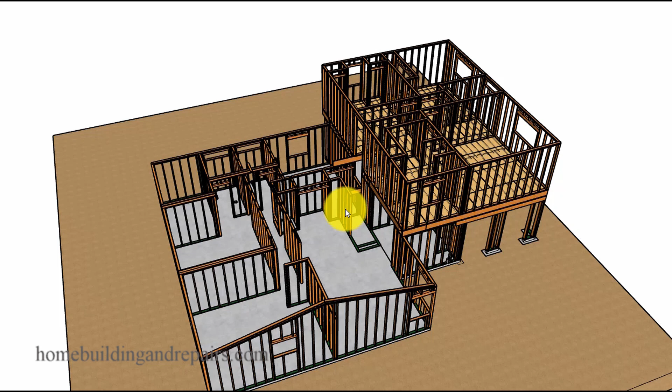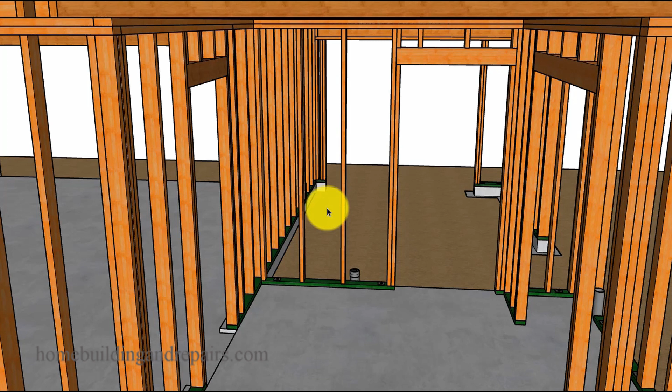In this video, I will not be showing you how to figure out and cut all of the stair stringers and the rest of the components. However, I will be providing you with a stairway that I built one time for a second story home addition, and some of the reasons why I built it that way.

So let's go ahead and get started with the front door here. You will come into the front door and into a little entryway, and then you will come through the stairs into a dining room, living room, or you can go into the garage or up the stairs to the second story addition.

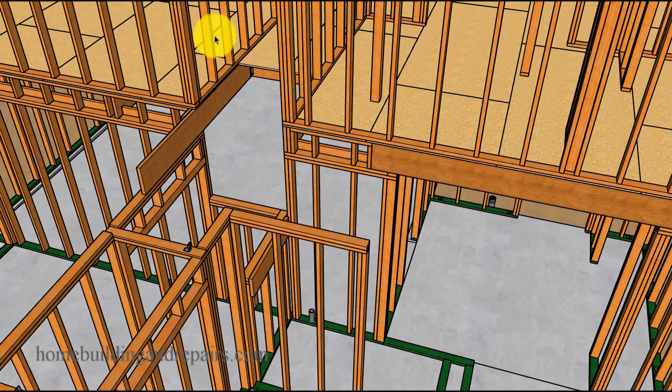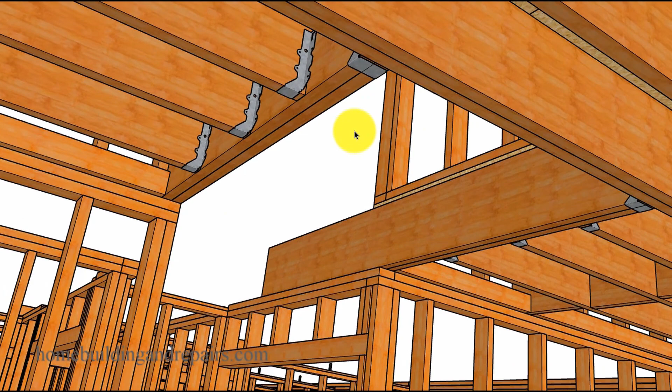We have the floor framing and the double joist on each side that will be supporting the other joists here, along with a double joist that we will use to connect the stair stringers to at the top, and of course our double and single hangers. This will also be the ceiling in the garage, along with the walls that will be supporting the landing.

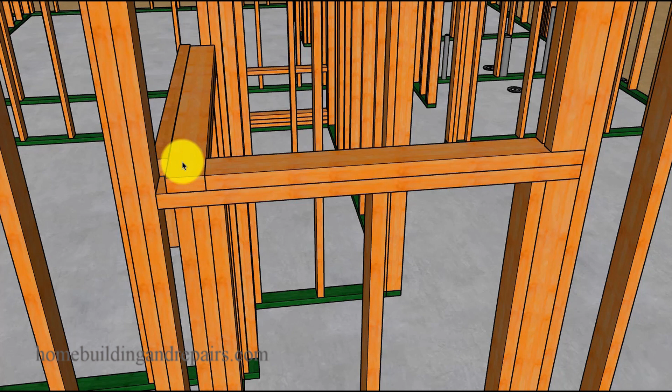Now, if you notice here, I set this back an inch, and that's because we're going to be using the rim joist here as one of our risers. Otherwise, I would have set it back 1 3/4 inches if I was going to use a piece of material for the riser that was going to be 3/4 of an inch thick and then attach it to the front of the rim joist. That will make a little more sense later on, along with bringing this plate out so that I could make a nice connection to the wall framing studs.

This might not seem like a big deal, but I've seen plenty of framers stop this right here and then add some type of a spacer block, and that won't be needed if you do it this way, along with a ledger that we will use to connect the lower stair stringers to the platform.

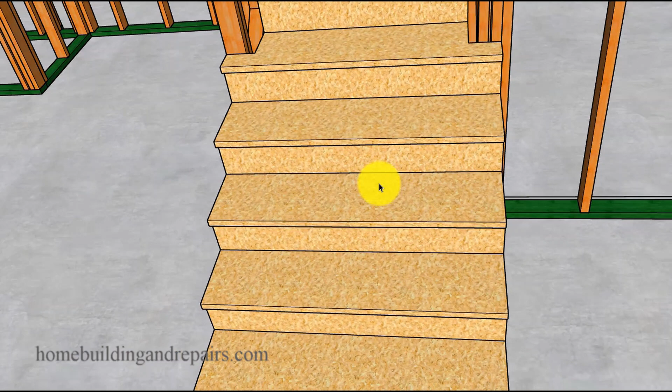Next up, let's go ahead and install the stairway. We're going to be using 2x12 for our stair stringers, along with 3/4 inch OSB for our treads and risers. We will be installing 2x4 studs that are going to be angled at the top underneath the stringers on both sides, so that we can drywall the sides of the stairway and have a nice flat wall here. And of course, we will need to install angled fire blocks.

For those of you wondering why we nailed a 2x4 onto the side of the stringer, that would be to provide us with enough space to install drywall and a skirt board up against the inside of the stair. That would be on both sides of the stairs.

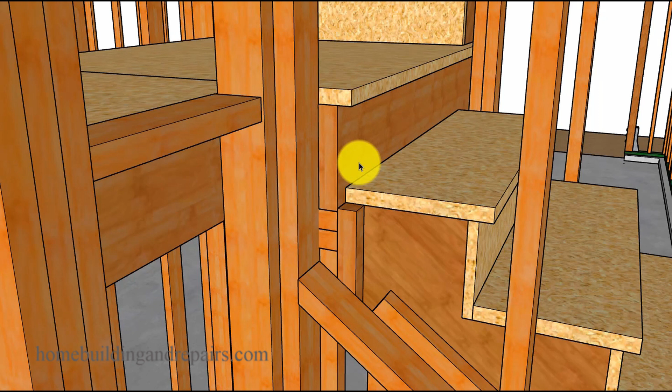And of course, our rim joist here, we did not put a riser on here. Something like this will usually require you to remove an additional 3/4 of an inch off of the top of the stringer. So just don't do this without doing that. And of course our 1-inch overhang or nosing, and our fire blocks around the perimeter of the landing.

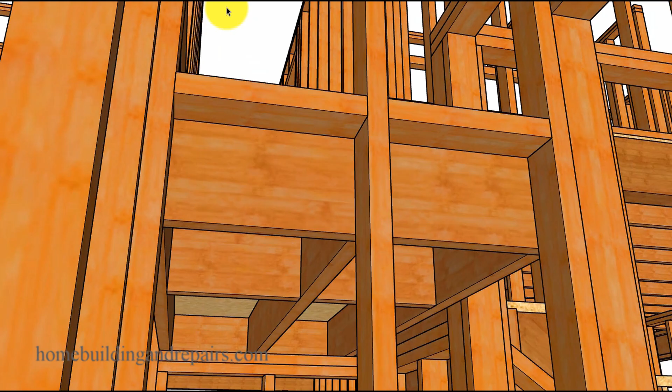And our joists are going to cantilever into the garage. For those of you wondering why I don't have any wall framing here, that's because this opening is going to have sliding closet doors.

I will need to get a little creative here when finishing it. Really all I'm going to do is attach one sheet of drywall here, and then glue it to the piece of drywall I put on the other side.

If you needed more room, you could always move this joist back a little bit so that the drywall on this side could run all the way down, so you could nail the back of the drywall into the joist and the front into the framing on the other side. And of course I have blocks here so we can break the plywood.

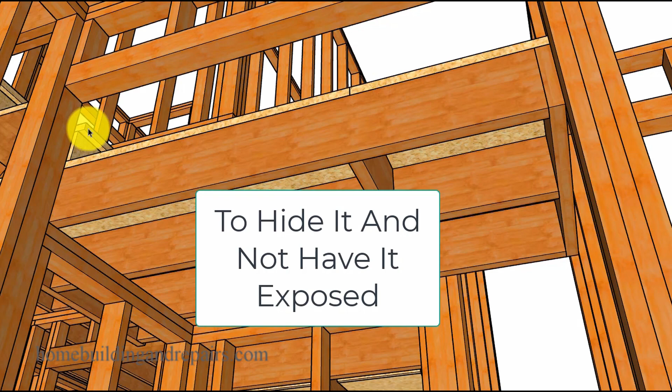I wouldn't be doing this if I wasn't going to be building a wall above here. You'll learn more about that in a future video when I show you how I'm going to tie everything together. So if this was going to be our landing and it was going to run all the way across here, I would try to put the break underneath the stair stringers if I could.

And of course our cantilevered landing here so that our stringers can sit on top of it, and we will need a wall here. So let's go ahead and build one.

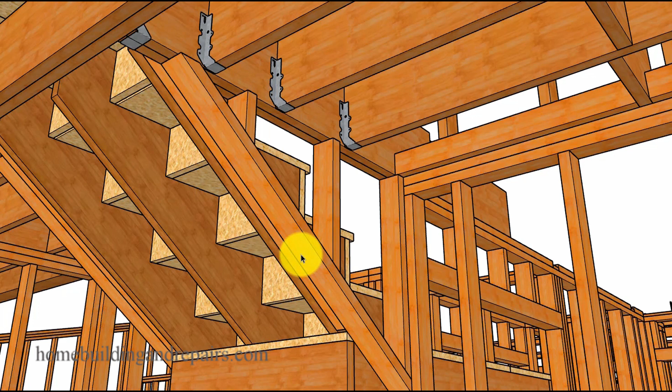We will have an angle at the top and an angle at the bottom, and you will need to check with your local building department. Sometimes you will need a 2-hour firewall underneath the stairway in a garage. That would require 2 layers of 5/8 Type X drywall anywhere the stairway was exposed inside the garage. Hopefully that makes sense.

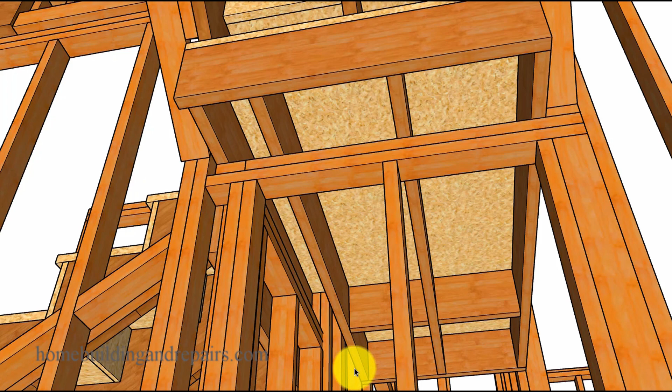All of our framing can be attached with 16D nails, including the cantilever along with the joist. You can use hangers if you want to. Something like this I wouldn't feel would need it. However, I understand there are a lot of people who are hung up on hangers and almost every type of building hardware out there. I came from an era where they were just starting to use all of this stuff.

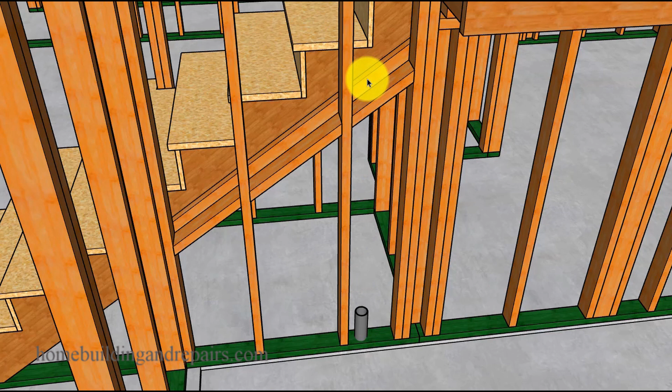And of course, our wash machine drain pipe, this is going to require a vent. So we will be notching the blocks for the vent and any of the water lines, or even the dryer vent. Another thing we are going to need on this project.

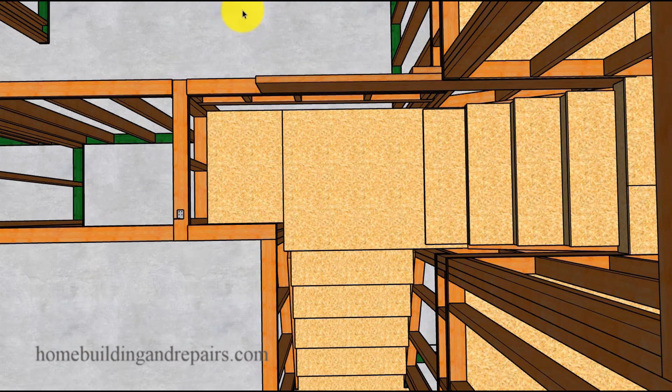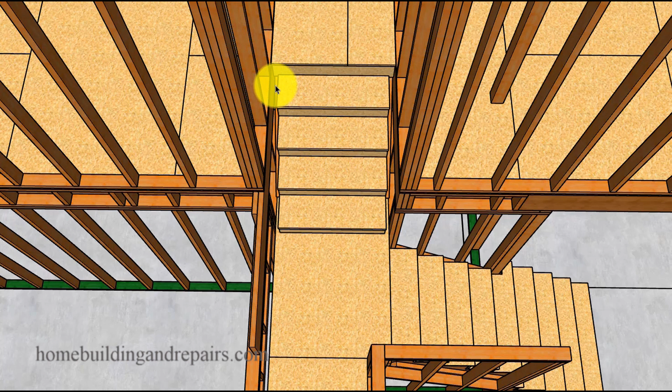An upper view of the lower stairway, the landing, and there will be a wall built over this part of the landing to create a flat interior wall on both sides of the stairway, or should I say all 4 sides of the stairway. You can see here where we have a 1.5 inch gap so that we can slide our drywall down and then slide a 1 by, or 3/4 inch thick piece of lumber that we're going to be using for our skirt board, without having to notch around each one of the steps.

One last thing I want to point out is that when you are building a house with stairs, it will benefit you to locate the stairway in a spot that will reduce the travel of traffic throughout the house. For example, if I come in the front door and I have to go to the back of the house to climb up the stairway so I can go to the bedroom in the front of the house, that's not going to be the best spot. In a situation like this, near the center of the building might be best.